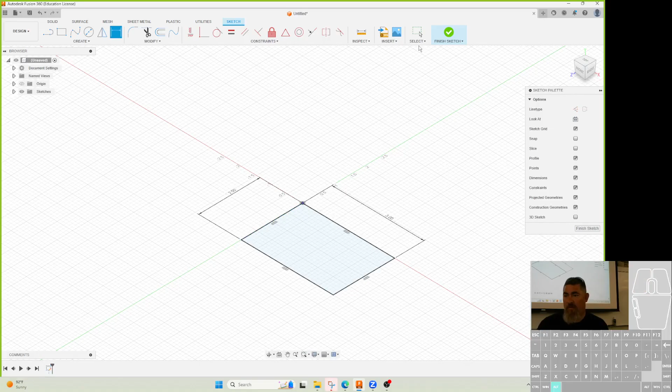Okay, so I want to make something like this, where I have a cut on the edge. I have the edge of the part, and I want a little rectangular cut centered on that edge. Let me extrude this up. So I want a cut right here, cut all the way through there.

Let me fire this up so I can actually draw. So actually, if I do this, I want to cut right here. I want this cut out right there. All right? I want to cut that out.

How should I do it? Any ideas? Sketch on the top plane or the front plane? Yeah, I could do either one. I can sketch on the top or the front.

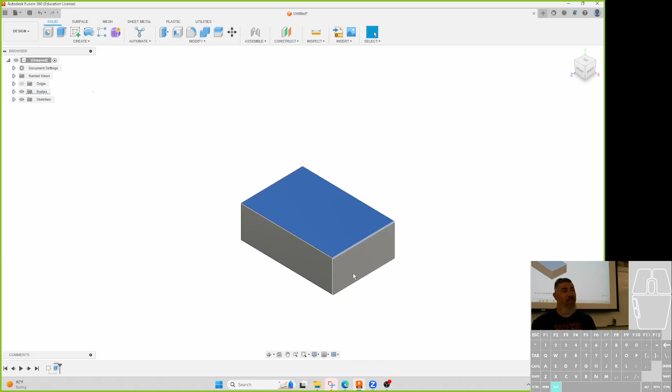So I prefer to sketch where I can see what's going on. If I sketch here, what am I going to see? You're just going to see it black. I'm going to see two lines, right? If I sketch here, what am I going to see? The full rectangle, the shape of the thing, right?

So I'm going to prefer to sketch here where I can see the shape of the thing, not just two lines going up and down. Because I'm going to sketch a rectangle, and here I'm going to have two lines on top of other lines. It's kind of going to be a pain. But here on the top plane, now I can actually see the thing that's the shape that I'm wanting to make. So that's where I'm going to do it.

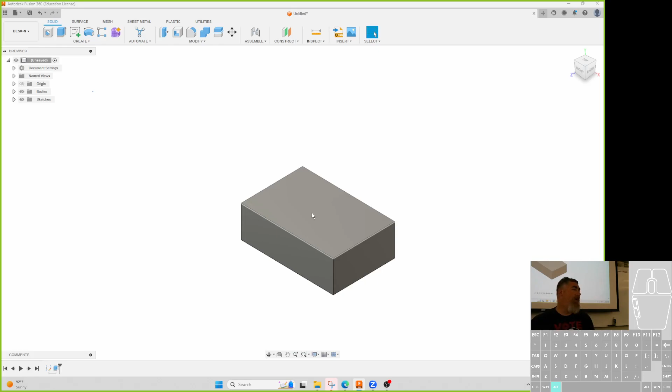Which is right? Yeah, kind of personal preference. But I prefer sketching where I can see it.

So what do I need to sketch? A rectangle. Where do I need to sketch it? On the center of that line. The side of it - I want it centered on that line, right? But I want to make it right here.

Why did I do that? Why didn't I sketch it on that edge? Because you can move it over with the midpoint. Because I sketch it - oh, see, look, I accidentally clicked my corner on the midpoint. That's exactly why. If I do that, I can never make it centered.

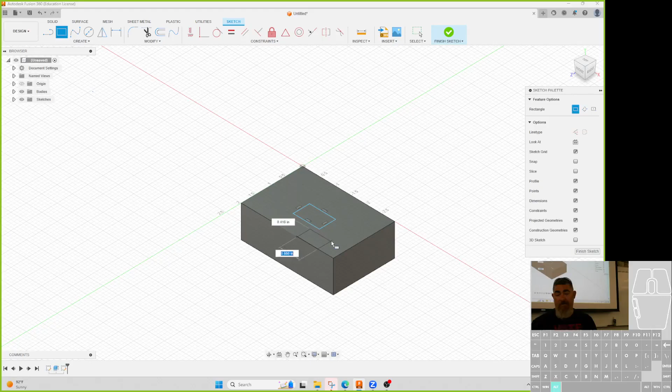But if I click it here, even now I've got two edges on top of each other - this edge and this edge. I have to be a little bit more careful how I pick which thing, to make sure I get the center of the right thing.

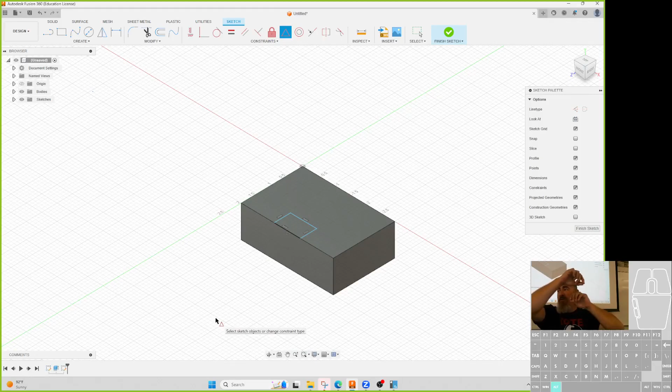If I do an offset, now I can just do midpoint. I can just go, easy to grab that edge, easy to grab that edge, right? They're easier to grab if they're not on top of each other. If it's on top of each other, now you have to have more time to figure out which one I want. If they're over here, it's easy to pick. So I like to have them over here, and then click on them, they go back together, right? It's faster.

Now if I can grab this corner and look, grab this corner, it's behaving correctly. Like I said, make sure it behaves correctly before you add any dimensions. It is centered there, right?

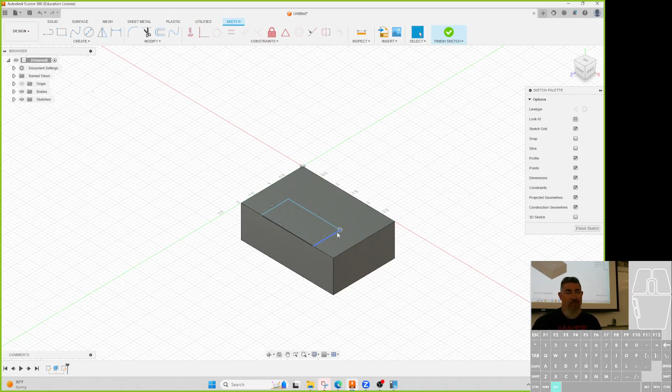Also, I used the rectangle, I didn't draw 4 lines, right? It's easier, it's faster to draw a rectangle, click, click, than it is to go click, click, click, click, click - ah, it's not horizontal, click, click, right? So what's faster? Do the thing that's faster. Do the thing that's easier.

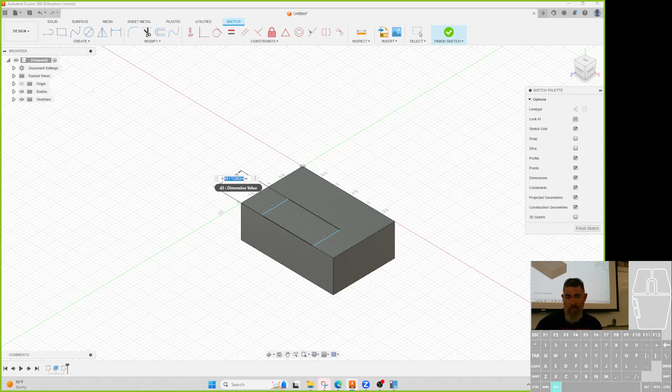So now I can go in and add a dimension. So I can tell it I want it to be 0.75 deep, and I can tell it to be 1.5 inches wide, right? Boom.

I hit finish, I can extrude it. Tell it there - I want to go down 1/4 inch. What do I do? Negative 0.2... yeah, distance, negative 0.25 goes into it.

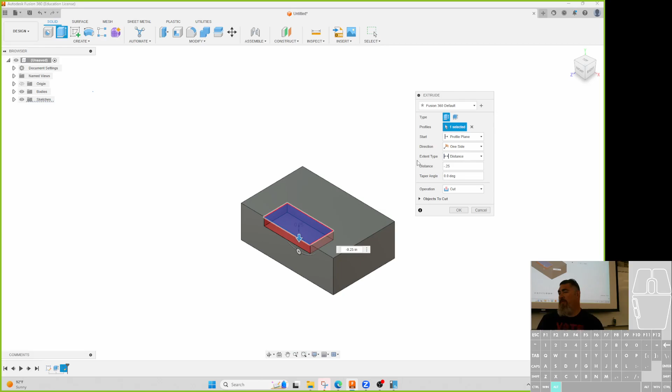What if I want to make it go all the way through? Do I just say negative 1? No, you use the all. Nope, extent - say all, right? Go to go all. If I haven't even done that yet, I just go here and say all.

Nothing happened. Ah, you don't know what direction to go. What should I do? I usually drag it down. So look at the arrow - the arrow's telling you that it's wanting to extrude up all the way through. Right, because remember, the default is to go away from the part.

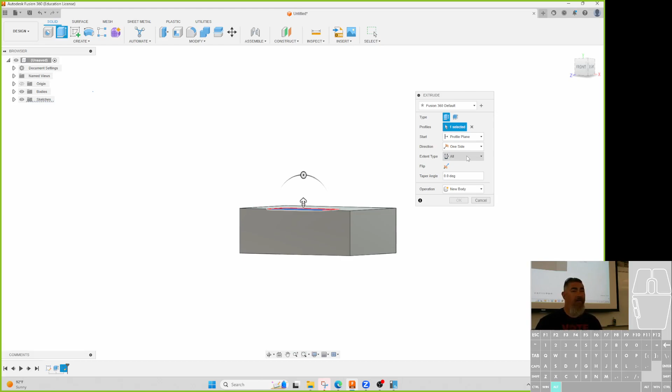It didn't click that 'all' means it should be a cut, because you can't extrude forever—that's impossible. So just hit flip, and it's automatically going to switch to cut. It goes down and cuts into the part.

In other programs, like Inventor, if you tell it to go all the way through, it automatically switches to a cut. In SolidWorks, you have a separate command for adding an extrude and a separate command for cutting an extrude—they're not the same command, they're two different ones, because that's the way they wanted to do it. So again, it's about knowing the program—say all the way through.

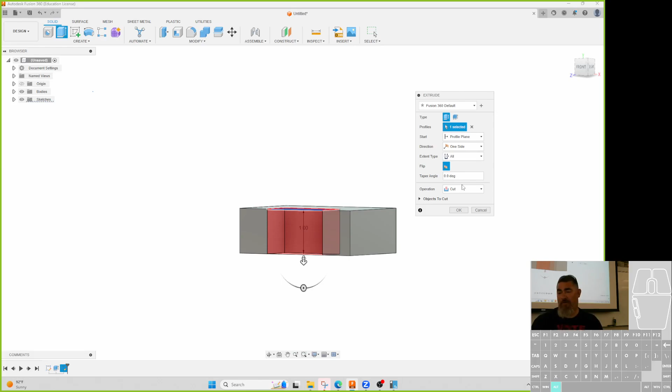So now if I go back and change this to be 3 inches thick, it still goes all the way through, right? What happens if I change this dimension to be 5? What's going to happen to my slot?

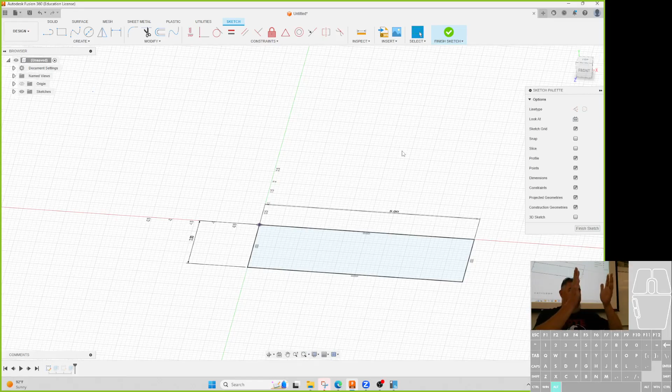It'll remain centered on the part, even though this sketch is uncentered—it's still going to be centered, right? Is it going to stay, get wider, or stay the same width? Same width, because I dimensioned how wide it was. So it's going to stay the same width, and it's going to stay centered.

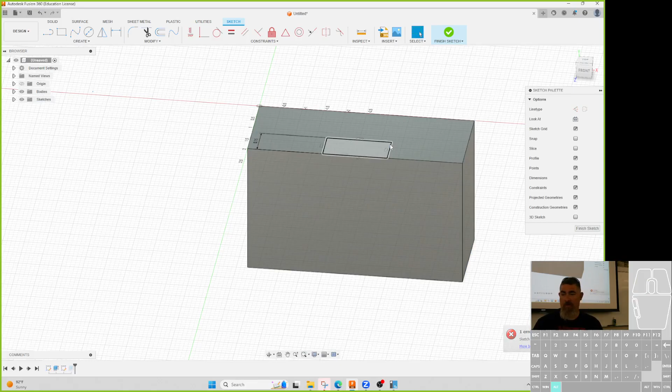What if I want it to always be a half inch from the side? What should I do? Define the dimension in relation to the side in general. So instead of doing this dimension, do that dimension—dimension from here to there, 0.5, right? Now it's there.

And now if I go back and edit this, it's always going to be a half inch on that side. So dimension the thing you care about. I was going to make sure that this would work.

You could also define the length of that cut as half the length of the overall line. I could, yeah—I could also do an equation like you said.

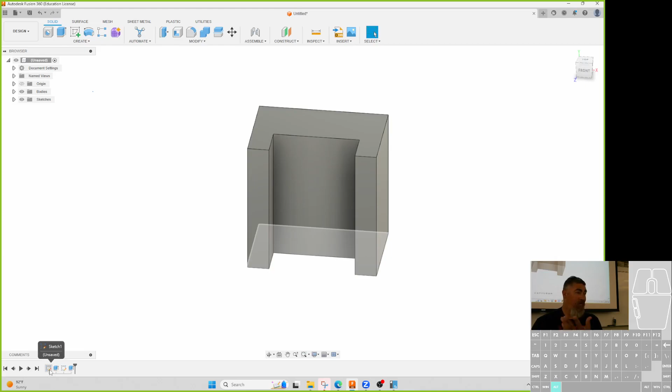So remember this dimension? If I put my mouse over it, it says D1, right? It has that D number. So I could say that I want this cut to be half the width of that—this dimension is D1 divided by 2. So now it's telling me it's 1.5 inches.

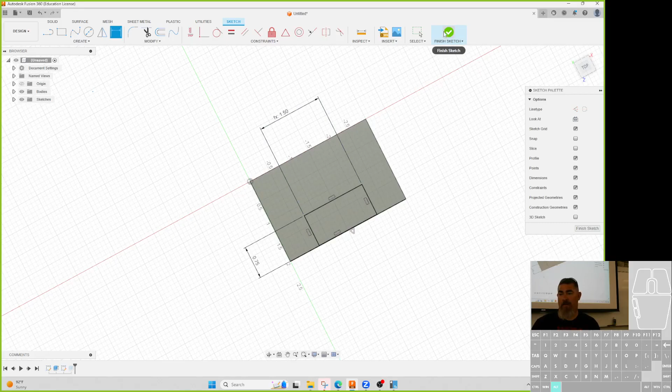And then if I change this one to be 8, that's going to be 4. So yeah, we can do that too. You can use equations, but you can also change what you're dimensioning to—all kinds of different things.

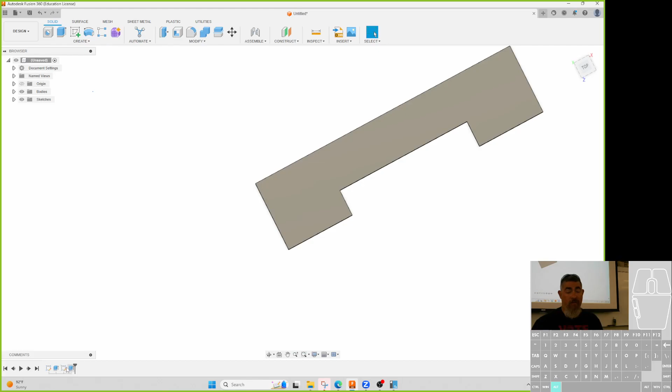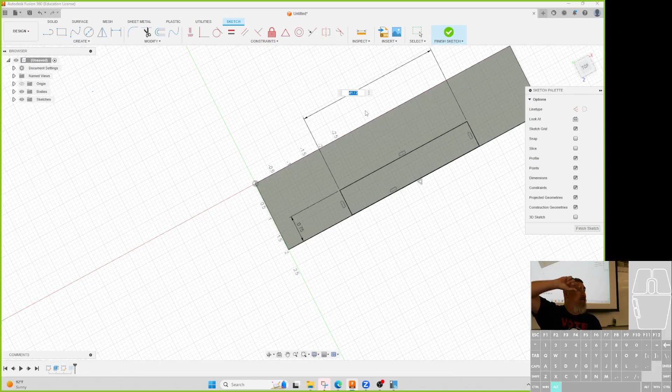Remember, if you're going to do the math, do the equation—let it solve it, don't solve the equation yourself, ever. If you come up with a situation where you think an equation is going to work, sometimes equations are great. I did that with Lego blocks—there's a bunch of equations on how different things should be proportional and sized in a Lego block. For that, use equations. You're given equations for the size of that, use that. But don't solve the equation yourself, just put it in and let it do the math.

So centering on an edge—easy, right? Just make a rectangle, use the midpoint, and dimension it relative to whatever it needs to be dimensioned to. Same thing: sometimes instead of this dimension, you're given this dimension—use whatever dimension they give you on the drawing. So if I give you this and tell you this dimension, use this dimension on your sketch. If I give you this and give you this dimension, use this dimension on the sketch, right?

What about on this bottom one?

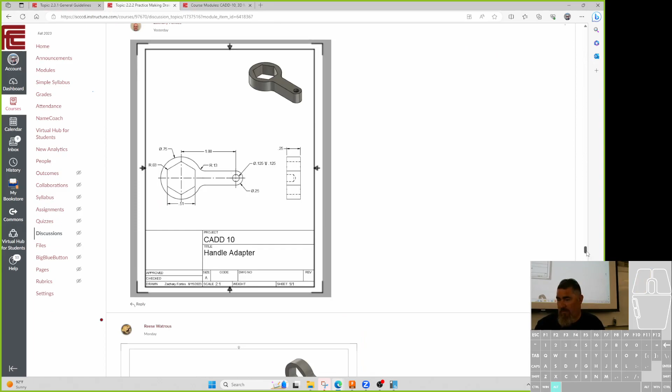So on this one, which of these do you think is the important dimension? The 2, the side 2, or the middle 2?

So we're going to make this slot here, and we want it centered on the part. So that's the next thing, centering things away from the edge.

But what do you think is important, this 2 here or this 2 here? Which do I care about more, the width of the slot or being 2 inches from the side?

Remember what is this for? To receive something. Remember what I told you this was for? Oh, it's for the Kleenex box, right? So this is the slot that the Kleenex comes out of.

So this is where sometimes this random part is hard to figure out what's important. This part here that we know what it does is a little bit easier. So that's a slot for the Kleenex to come out.

So in that case, what do you think is more important? How wide that slot is, or how far it is from the edge? The width, the width of the slot, because then you get your finger there to grab the Kleenex to get it started, right?

So if this thing becomes skinnier, if they decide, oh we don't want it at 6 inches, we want it at 4 inches, you still need it wide enough to get your fingers in there.

And so 2 inches, that's enough for fingers and a little bit of pinch space, right? If that went down to 1 inch, I can't get 2 fingers into 1 inch. Even just 2 fingers stuck together is 1 inch and 3/8.

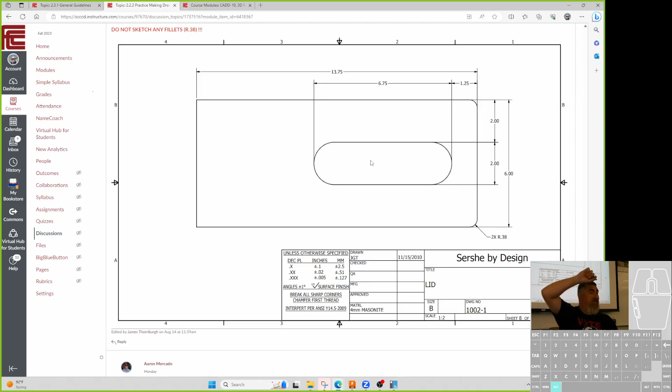So when we do it, this is what I'm going to care about. I'm going to make it centered and use this dimension, not this dimension, right? Depends on the application, yeah, it's all application.

So that's where, yeah, some random block, it's hard to determine the application. That's why designing our own stuff is sometimes easier than drawing it out of the book, because here we have to kind of figure it out. Drawing your own stuff, you know.

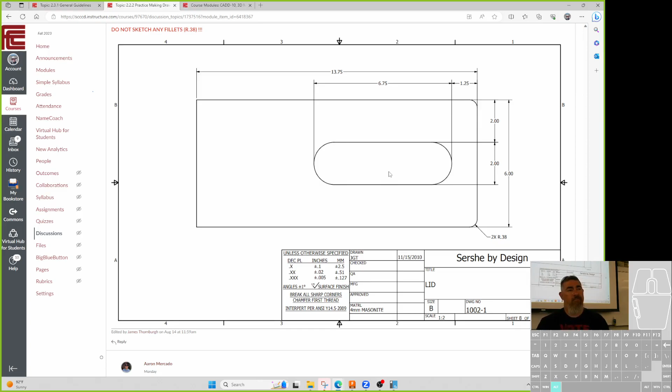So let's do this one. I need to center this thing away from the edge. So let's get out of here. I want to do a similar thing to that, so I'm gonna kind of get there.

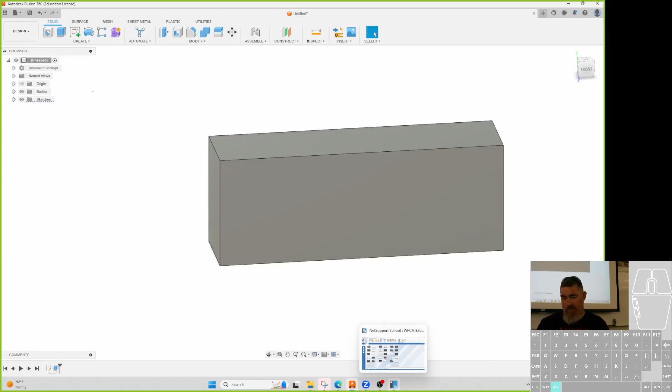So first thing is I want to make that slot. I want to have it centered on the part, kind of over here, right? So actually I'll just edit this part to be that. Let's go.

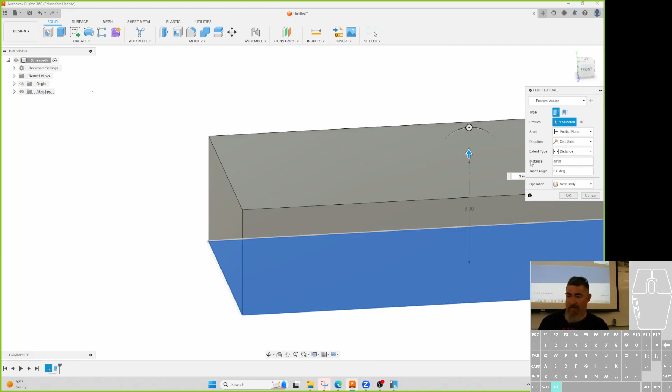So it needs to be 13 3/4 by 6. So I'm just gonna go here, and change my extrude to be 4 millimeters. Boom, there we go, right?

There, I got that, so I need to do that slot. What should I do? Make a slot, or make a sketch though, right? Sketch on that surface, and then sketch my slot, sketch my geometry. Which one should I use?

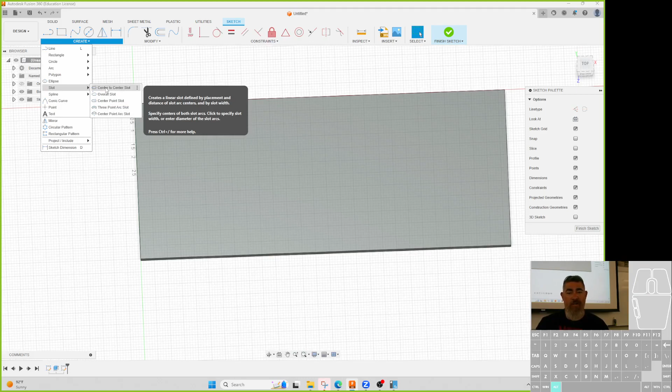The center to center, the overall, or center point? Center point.

So if we look at here, center to center would mean it would be centered in. Did I give you the center to center distance? Overall, I gave you the overall distance, right?

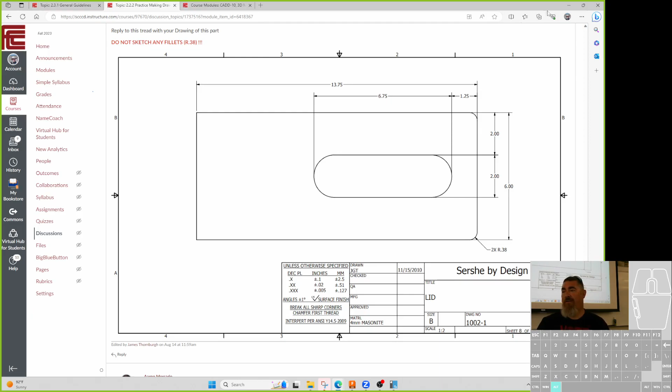So which one do you think you should probably use? The overall. So we click overall, now we can just click, click, click. Draw on the slot.

So there's my slot. Is it centered on the part? No. So I want it centered up and down, right? I want it centered up and down. Is it centered side to side?

No. It's off to the side over here. It's not centered side to side, but it is centered up and down.

How can I make that centered up and down? Without dimensioning it. I want to make the geometry centered. I want to use a geometric constraint.

You define the center line there as a midpoint between the two face edges? You're on the right edge, the right thing. Where the midpoint of that solid line rather than the... So I can use the midpoints, right?

Yeah, watch this. I do a line from the end of here to the midpoint. Now I can move this. Those are connected, right?

What happens if it's actually in the middle of the part? What happens to that line? It becomes horizontal. Yeah, so when I make that line horizontal, it locks in the middle of the part. Now what if I grab this corner?

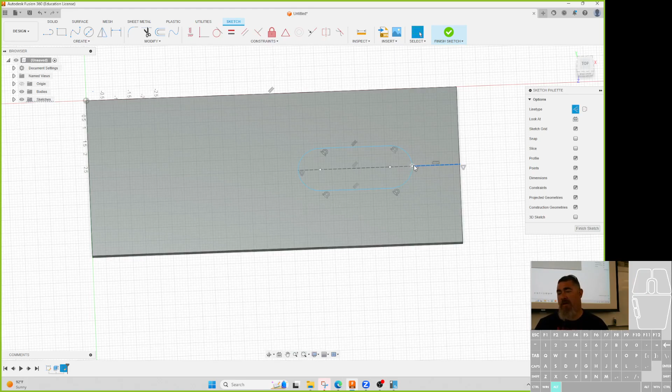But you can see by making that line horizontal, now it's locked in where it has to be centered that way. So now I can start dimensioning it, because now it's behaving the way I want it to behave.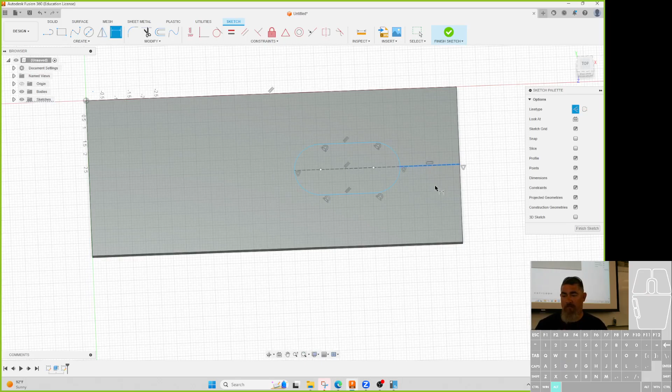So now I can tell it to be 6.75 by 2 and 1 1/4 inches. So dimension my 1.25, my 2 inches there, and my 6 inches there. And it locks it down. And then I can cut it through, all the way through, flip it, all right.

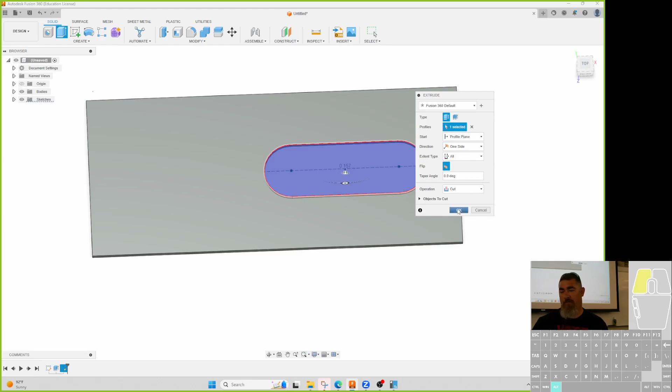Now if I go in and edit my part, and I make it 4 inches, that slot is still centered on the part. Okay? Make sense? That's so much easier than how I did that.

I didn't know the slot tool existed, so I did a square, two rectangles, and 2 circles. That's why I used to use it before they started adding the slot command to everything, because the slot command was only added to Fusion in the last year. Until then, you had to do a rectangle and add two semicircles on the end, or draw a rectangle, then fillet at the corners. So either of those ways was how we used to do it.

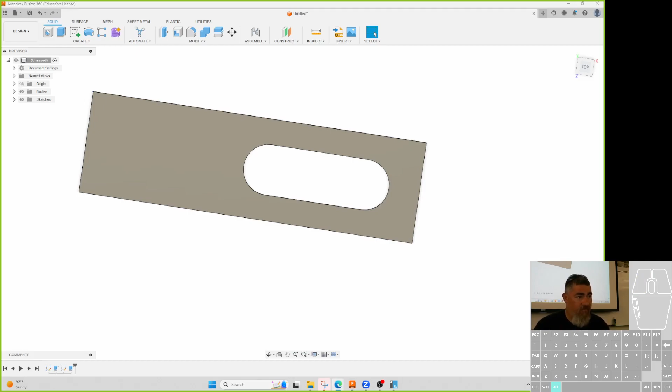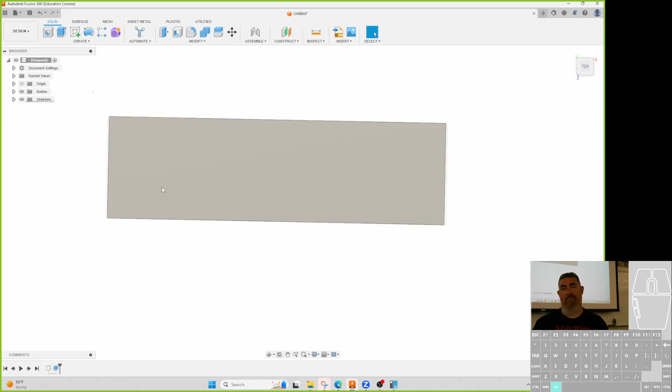All right, so doing that. So what about centering something on a face? Let's say that I want to make a rectangle right in the middle of this face. Wouldn't you be able to theoretically just do the exact same thing twice, where you center it on one line and center it on the other line? Yeah, so let's say I want a rectangle right in the middle of this thing. If I go to rectangle, look at my options for rectangle, center point - I have a center option here, right? Yes, I probably want to use that rectangle.

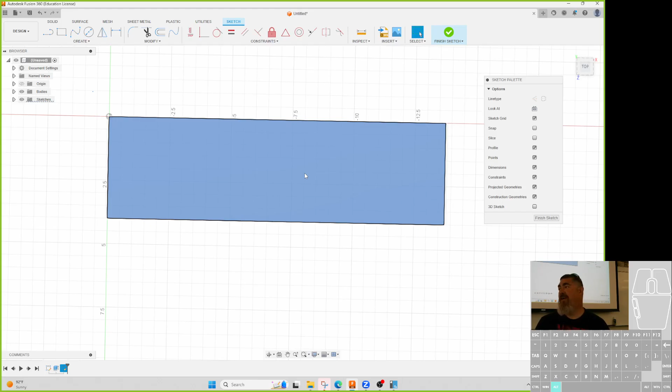But first, it'd be nice if I found the center point of this face. How can I find the center of this face? Center line - there's 3 ways to do it. I want to find the exact center of this face. One is to just throw 2 lines off the middle. Don't even need 2 lines, right? Because as soon as I have 1 line, I can find the middle of that 1 line, right?

So I can do either a line corner to corner, which is kind of my preference, because now I can see that that line is going corner to corner, and I can make it a construction line so I know, all right, here's my construction line. I know it's going corner to corner. I know I have the exact middle of the thing.

It could be a line here. Actually, if you turn the construction on first, before you draw your line, then it'll make a construction automatically. So you can either do a vertical line there, horizontal line, or an angled line. All 3 of those, the midpoint of all 3 is right there in the middle.

Which one is the right one to use? Kind of depends on what you got. So on the sample stuff today, there's sometimes where you want the center of the face, you do this way, but you want to center it between two different edges. Maybe this is the right one, because now I can also do the same line here, and now I have a midpoint between these 2 edges that I can move this way with the dimension, right?

So I want it centered vertically, but I want it 2 inches from the side, so I could do just this line and use the midpoint of this line, right? All right, I could put in, let's say I could put a point right there, so that I can make a hole, right? So now this hole is halfway between this and this far over, or that far over, right? So I can center in one direction and give it a dimension another way. Does that make sense?

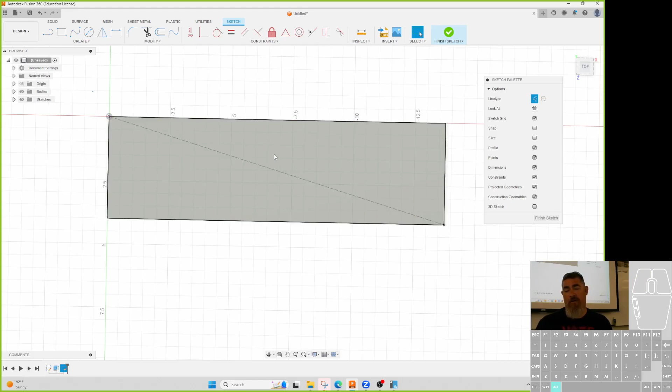But for centering a rectangle or a slot on a rectangular face, my personal preference is to draw the rectangle line or the diagonal line. If what you do, I don't care, as long as it works. So center rectangle from there. Oops, I don't want it to be a construction line.

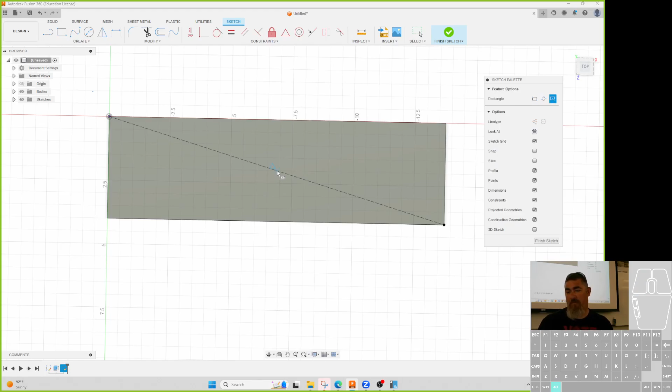Boom, and now you see it's centered. It moves centered. And because it's a construction line, it's not breaking up my rectangle. If this was a regular line, now I've got two halves of my rectangle. It's kind of a pain. So anytime you're using a line to help center stuff, make it a construction line so it doesn't break up your shape, okay?

Fusion is a little bit less picky about it. SolidWorks is super picky about that. So now, what's the next step before I move on?

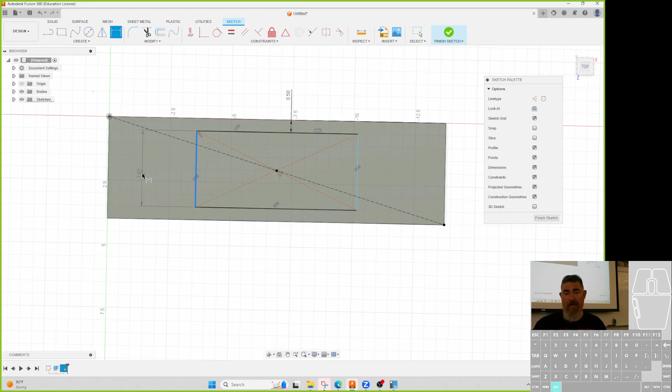Dimension. Round, what does R mean? Radius, right? R is radius, yep. So I can dimension. Let's say I want this to be 1/2 inch from that side, and I want it to be 1 inch from that side. Boom, I can finish it, extrude it.

Maybe I want this to go positive and add to it. So now I can give it a distance that way.

So you would do those lines if you didn't know the measurements of the sides? Like if you didn't know it was... It depends on what I want, what I want to be important. So if I want it always to be 1/2 inch from this edge and always to be 1 inch from that edge, then I put those in.

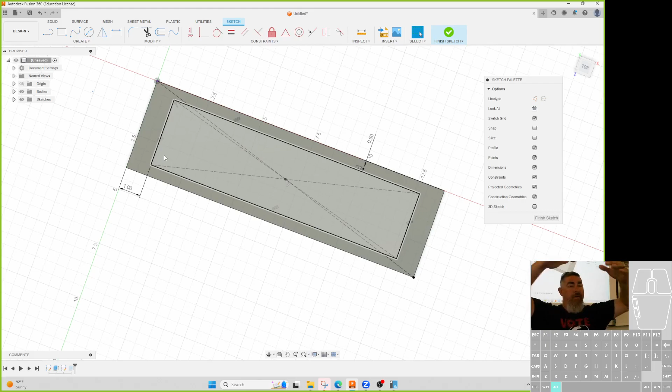If I know that I always want this one to be a certain measurement, then I put this dimension. So kind of like if this is a lid for a box and I want the overhang to be 1/2 inch front and back and 1 inch on the side, no matter how big I make the box, then I would do it this way.

If I cared about this needing to be exactly 8 inches, then I would dimension this. Because then I could go here and say I want this to be 10 inches. And now this is always going to be 10 inches no matter what this changes to.

I meant the construction line. Oh, you know how you have the construction line? Oh, this one, from one corner to the other? Yep. Sorry, so you would use that if you didn't know the dimensions of the... Well, it doesn't matter if I know it or not. It's easier to draw it corner to corner and say start on the midpoint.

Okay, because I could do the math, right? I could make an equation. I could take the dimension for this dimension and divide it by 2 and dimension here. Right? I could do that. That's more work. Yeah, it's easier for me to draw it.

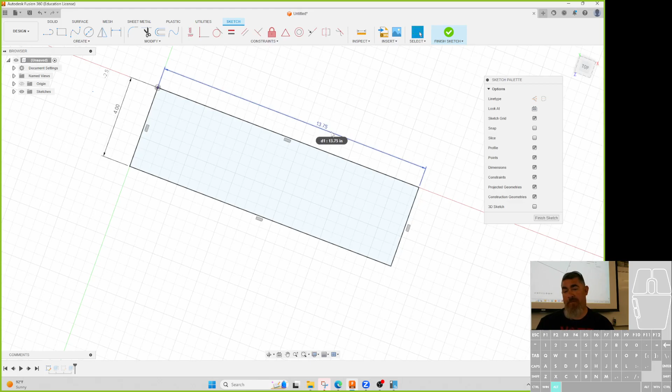But yeah, sure, I could do that. I could go in and write the equation that this is dimension 1. So I could come over here, instead of doing this, I could do a dimension from here to here and call it D1 divided by 2. I could, that's more work though. Right? Like I said, I'm lazy. I want to do the thing that's easy and fast.

They both work. Is one better than the other? Not an argument, I mean, situationally, maybe. If you want to have the option of having it be centered, but also maybe you need to make it off center, then maybe the equation might be better. But if you want it to be centered, make it centered. Don't make yourself do the math, that's kind of making it harder than it has to be.

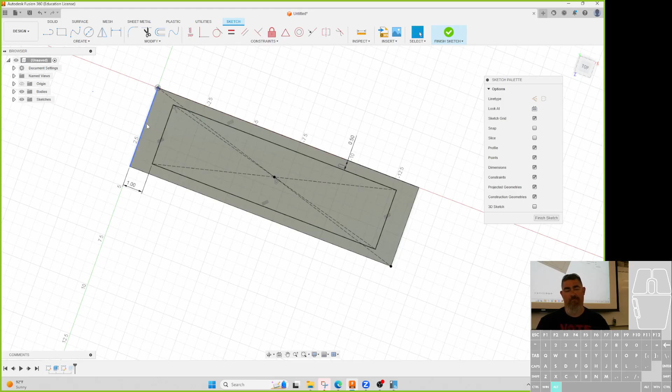And definitely don't just put in and do the math in your head and give it the answer. Because then if you change it, it's not going to stay centered. You want to make it so it'll always stay centered when you move it. Does that make sense?

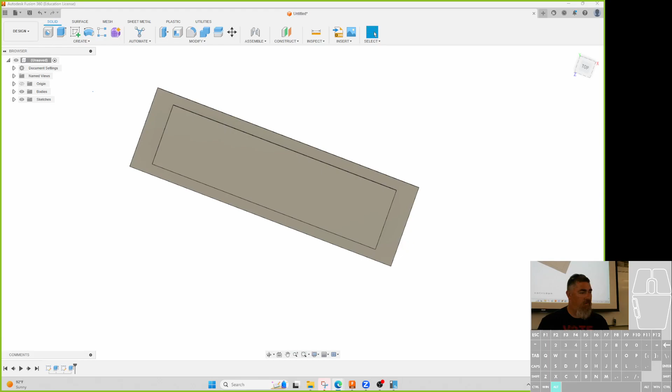Any questions on any of that so far? Centering on an edge, centering away from the edge. Yes, no? Actually, yep. So when you put in the construction line or whatnot...

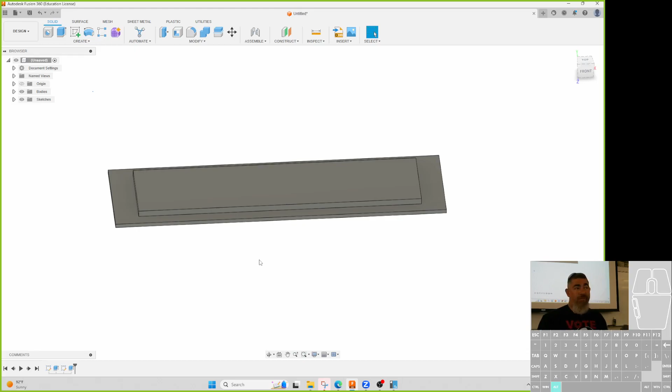I understand it's cutting it in half where you're putting it, but to get the actual middle point on it, or is it when you click? Every line has a midpoint. And when you click that on, is it choosing that middle point for you, or are you clicking it? So I did this here, and once I did that center rectangle, as you move across the part, you're going to get to where it has a little triangle next to it. That tells you it's on the midpoint.

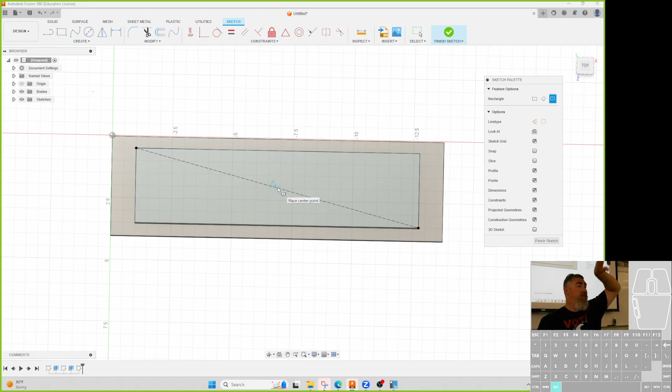I could also just draw that center rectangle over here, and I can do the midpoint from the point to the line, and have it move in. Either way works. So if you don't feel like sliding over and seeing where it goes, because for me that's a pretty quick thing, because it kind of jumps to that midpoint as you get close.

So remember that first exercise, the eyeballing one, figuring out where that midpoint is. If you can figure out pretty close to where it is, it's easy to go to it. But if you're not sure, just draw it up here and use the midpoint constraint. Go ding ding and have it jump down. If that's going to be quicker for you, do that. It doesn't matter which way you do it as long as it gets there. Does that make sense? Any other questions?

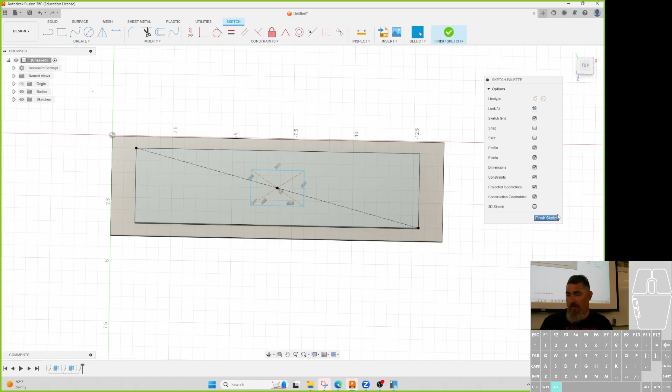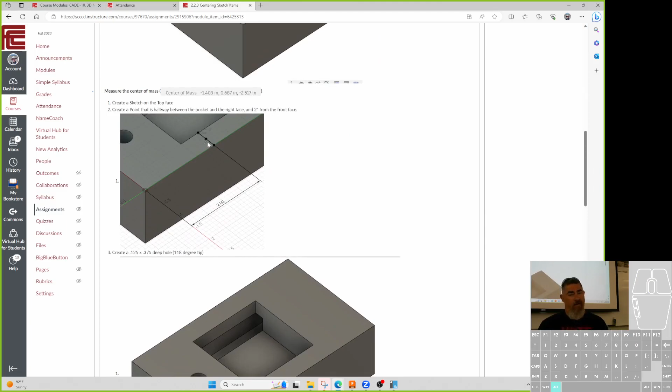All right, so the next thing I had talked about, if you look through, is centering holes. Same thing we kind of just talked about. So I have you create the line from the midpoint to the midpoint to the midpoint, put it in, and then a line between there, find a midpoint, and then just slide it across. So what I just did, right?

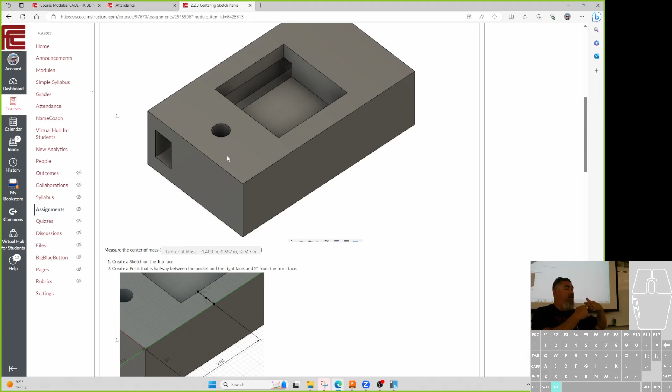What's a common thing that happens when you have a hole? So like you have a cylinder, you've got a hole going one way. Usually you might need a set screw or something coming from the side, right? So you need a hole lined up with another hole, right? Or you want it lined up with, like, here I've got a slot, I have you make a slot here. We want a hole lined up with this slot. But we can't see that slot from the face.

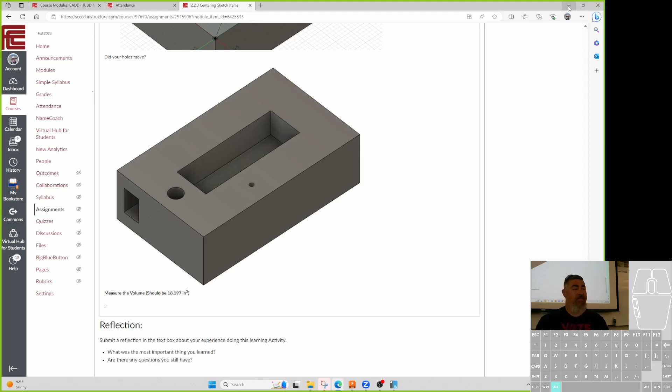And then there's a lot of times where you want to do something relative to something else that exists, but it's not on the face where you start sketching. Does that make sense? So that's kind of the next big thing that I want to talk about before I turn you loose.

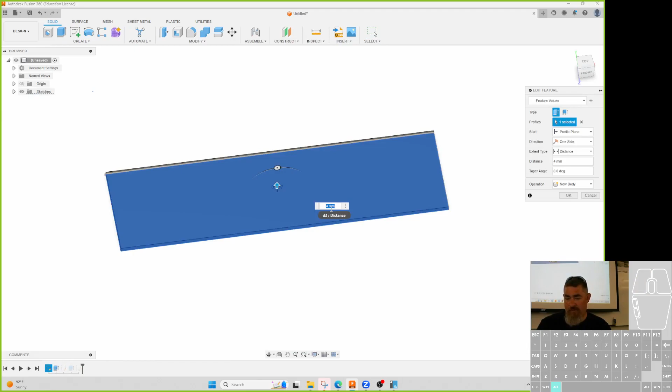So I'm going to throw some holes in here, and I'm just going to be bad about it. Just throw some random holes. And I'm going to change the extrude thickness. Boom, all right, I got some random holes. I don't know where they are, right? You saw me just put them in randomly. Don't do that. But for this example, that kind of works because I want to make holes on this face that line up with those holes.

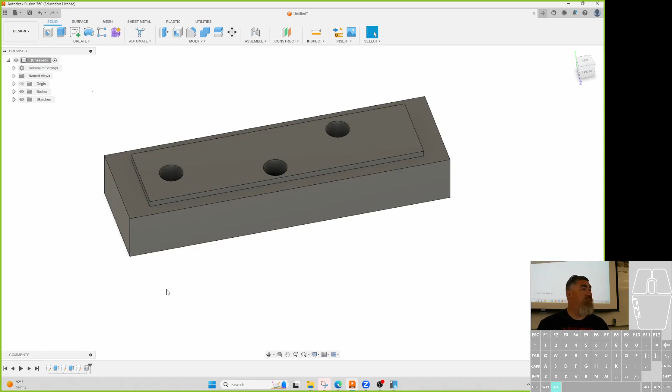So I want a hole over here that's lined up perfectly with the center of that hole. So I'm going to create a sketch over here. And how do I position a hole? What do I use? A point. So I'm going to draw a point. Actually, I'm not even going to do that right now, so I'm going to kind of wait to get there.

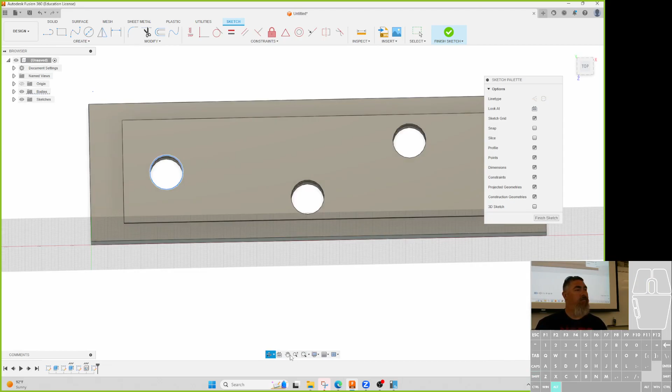But I want this hole here. So here's that top of that hole. If I look at that top of the hole here, what shape is it? Circle. Circle. If I look at it here, what shape is it? Line. It's a line, right? Becomes a line. So I want to make this show up over here, because if I have a line, I can get to the midpoint of a line, right?

So if I go in through Create, down to this option called Project or Include. This is a good one to do too. The shortcut is P, so get used to just hitting P, it makes it a lot faster. So Project is the one we want to use. Project takes anything that's not on the current sketch plane and makes it a line on our current sketch plane. So have you done stuff and had purple lines come up? Yes. That's a projected line.

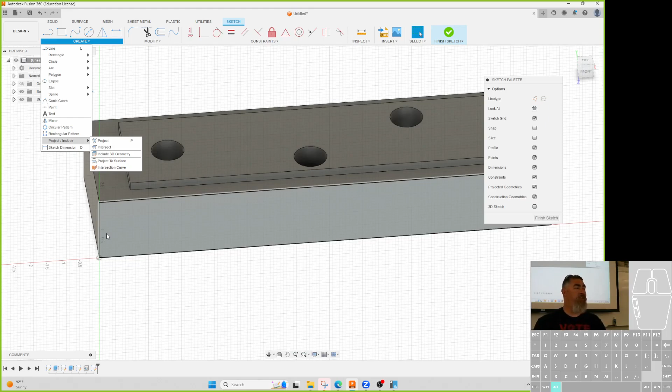This usually happens if you're dimensioning and you pick the edge down here first, it brings that edge even though it lines up with another edge you already have. So if I use project, I can pick that edge there. You can see it gave me a little purple line. I can say okay, so now I have a purple line sitting here. Because this part is set back, the edge is now kind of floating above it.

If I picked on the edge down here, so P for project again, and I pick the edge down here, let's see, pick on this one, I say okay, now I get a purple line. I can see the little purple circles at the end of it, the endpoints, that's lined up with this edge here, but it's on that other edge.

So if your surface goes all the way up, it's going to give you a projected line on top of the other line. If your surface is offset, then you're going to get a line floating in the middle of space. Those purple lines don't move. They have a little icon that's the projected icon, like a little plane floating above a rectangle or above a cube.

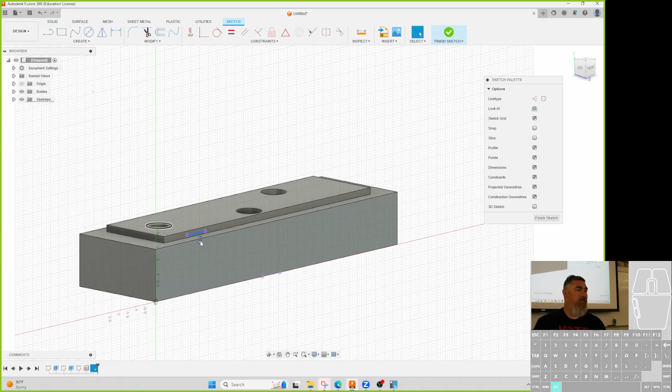So if I want to make a new hole centered with these, now I can just draw a line from the midpoint. So just slide over till you hit the triangle and then go down. Now it's centered. It can go up and down though, right? Same thing here, I draw a line, slide over until I get that, or I can just draw a line over here somewhere, and now I can use my midpoint from the bottom point of the line to that edge.

So I just have to make sure that I pick not the big long blue edge, but I pick the short blue edge that's just there. Now that one's going up from there. And it doesn't matter if it's going up or down, because I could still dimension this one from here to here and give that dimension.

Or I can dimension it from here to here, or I just pick the line, right? Or I can pick it from here, and you can see by picking that edge first, it's going to project it, so you can see it's got a little faded line here. If I pick something else, it'll bring it in.

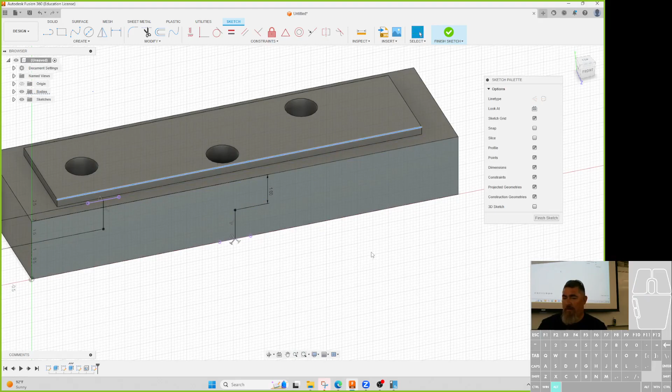So I do that, hit finish, I do my hole, click there, tell them to be threaded holes. Maybe I want it to be a half inch thread.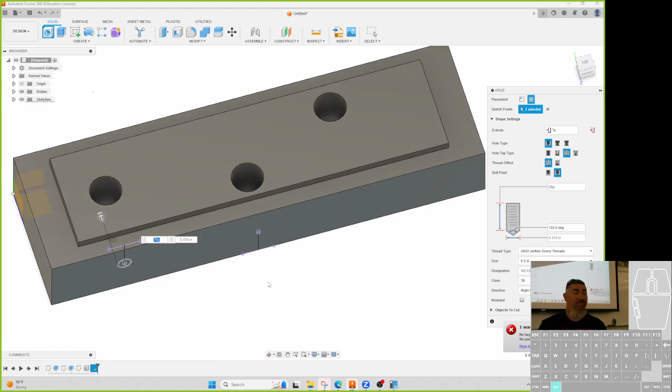But now I'm having a problem. I want to go to those holes, right? So I probably shouldn't have done them both at the same time. Well, that was the problem.

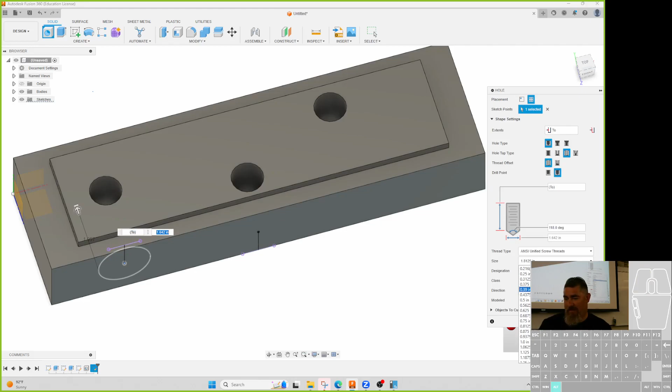So I do this one and I tell it to go to that hole, and I make it the right size. Now they're both going, it's going to go to that hole. Right, but if I pick this one it can't go to that hole. I see, okay, so I probably should have done one at a time.

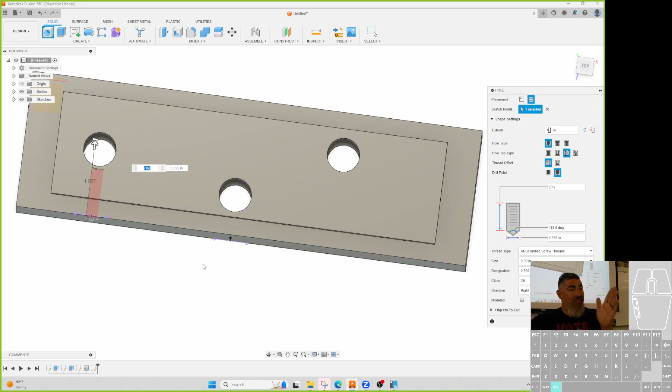Again, right, they're not the same thing. They're not exactly the same. I shouldn't do them on the same sketch, because the same sketch has to go the same distance. So this is another good example of do one thing at a time. Even though they look really similar, I want the same diameter hole, the same thread going up to another hole, but they're going to different holes. They need to be different sketches.

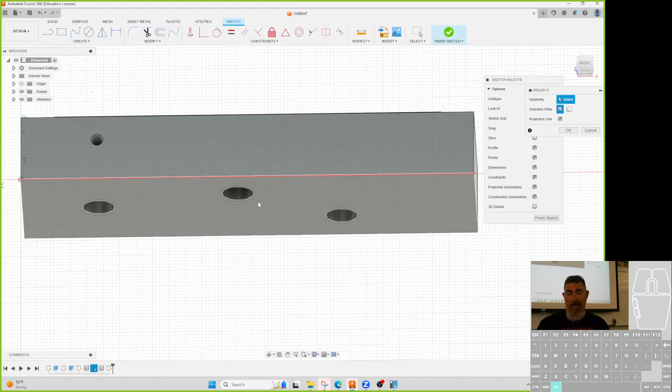Okay, so I should probably just go here, take that one out, just take out that, have just this sketch there. Now I can go in, create a new sketch here, project, look at the bottom of this thing, grab it, say okay, draw a line up. Now I can dimension from there to there, or from the bottom up, or whatever, to that hole.

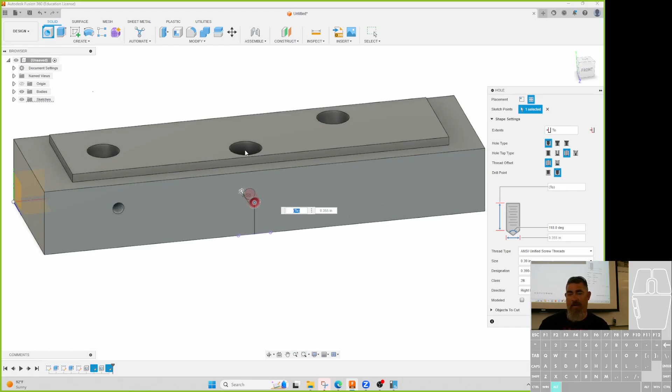And now I can even say, oh, maybe I want this one to be half inch, because that might happen, and maybe they are going to be different size diameters. Now I have the flexibility, because they are definitely not going to the same thing.

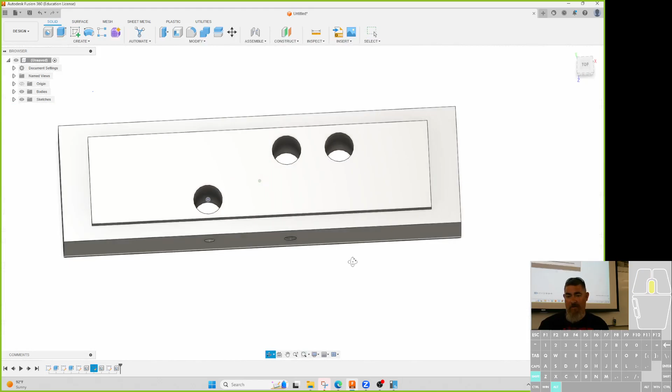But now they each do their own thing. You can see they go to the hole here, but they don't go through the back side of the hole. If I go and move these holes - I move this one to the back, and this one to the forward - hit finish, they're still lined up, and they go all the way through to that hole.

Did you select the inside of the first hole, or the edge? I picked the edge. So when I projected the edge, right at the surface - if you project and pick the surface, it'll give you a line for the top and a line for the bottom.

In Fusion, in SolidWorks, it'll make you pick an edge only, it won't let you pick the surface. In Inventor, it'll let you pick the surface, but it might lock your file. So I recommend, when you're projecting, pick the edge only, don't pick the surface. Always pick the edge.

That way you're going to get a line. That works better in all the programs. So again, the suggestions I give you, and my guidelines, work for what works best across all of them. It might not be the best in any one specific program, but overall, in general, they're the best guidelines - it's kind of the best practices to do.

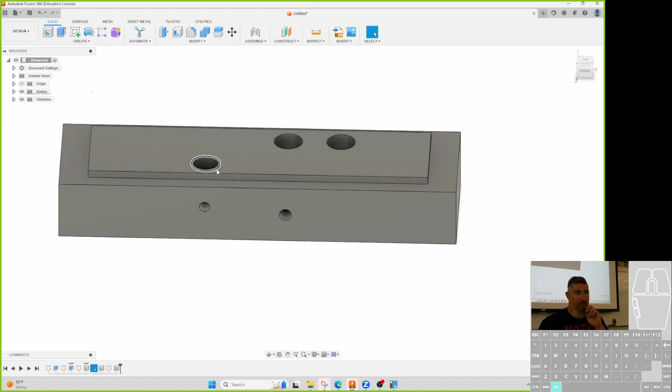Yeah, and so when you move those on the top plane, those holes, the holes we created on the side move with them because they're locked into the midpoint. Yep, because it's tied to it. So if I get out here, remember this line is this edge - so if this edge moves, this line moves, this line moves. And then the hole is connected to here, so that's the parametric part - things are all connected.

If I delete this hole - take that hole out, guess what's going to happen? There's another one too. I'm going to get a target box, yellow boxes down here. It's like, oh, I don't know what that is. Like the edge that I was using is gone. I don't know what to do. So the hole's still there because it was here last time, but I don't know what happened.

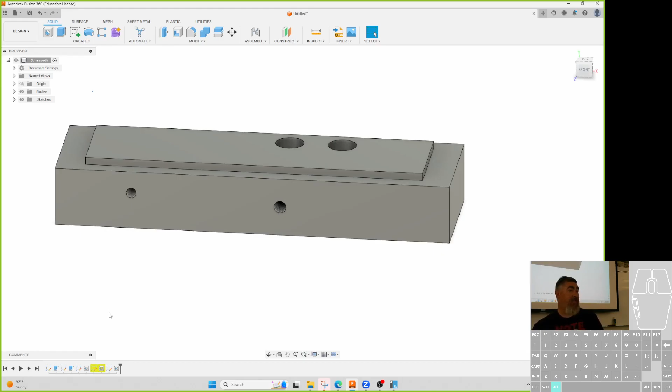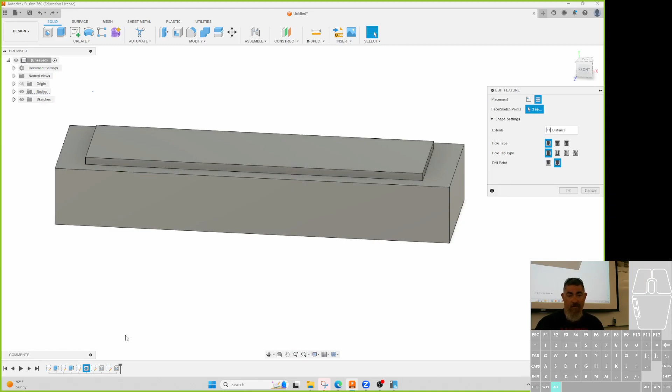If I edit this, now that line is nice and yellow, telling me, hey, my friend is gone, my buddy's gone, I don't know where to go - fix me now, right? And that'll also happen if you change that. Let's see, if I make that into a countersink - again, it's like, oh, the edge that I was looking at is gone.

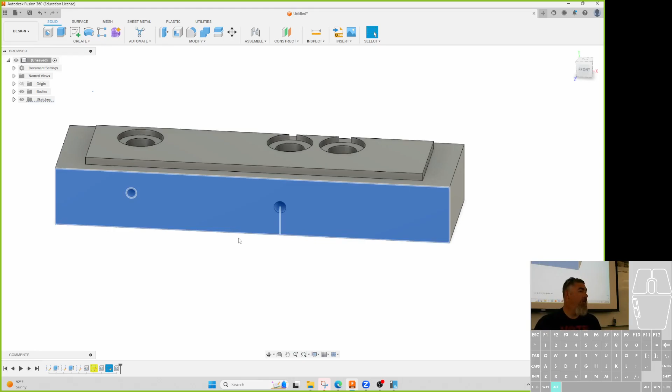But this one didn't do that. This one's still fine. Why? That's the bottom, right? So the bottom's still the same diameter, same thing. I can change the diameter, no problem - that's not going to affect it because it's just a longer or shorter line. But now that edge is completely gone, now there's another thing making that edge - that's why it threw a fit.

Would it be good practice, if you're having multiple holes, to have one be the same thing so you can make a change? Maybe, yeah, and that might be a thing I never even thought about before - that if you have something that might change between a counterbore or a countersink or a through hole, maybe instead of projecting the top edge, project the bottom edge, because you know that thing's probably not going to change as much as the top might change.

30 years, light bulb right now, in class. You saw it, you see it like flash above my head. Well, and so it's constantly thinking about like how can I use this, and oh, that makes more sense.

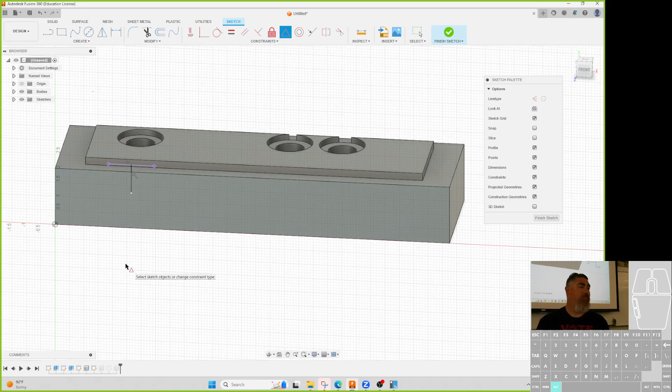So don't be afraid of things breaking, you can always fix it. Like if this broke, all right, cool - I decided I didn't need that counterbore. Delete that yellow line, go back, project the top of that counterbore, and then just midpoint that endpoint to that line. Then go ahead and dimension that back in again. And there we go, now it's not a problem anymore, it's back to being normal.

So I fixed the problem. Sometimes in the history, if you change something, it'll break stuff - just fix it, go in, reconstrain it, do whatever. But that's part of what we're going to go through more in this class, is trying to plan it out ahead of time, so that way things won't break as much. Any questions there? All right, so I'm going to stop this.